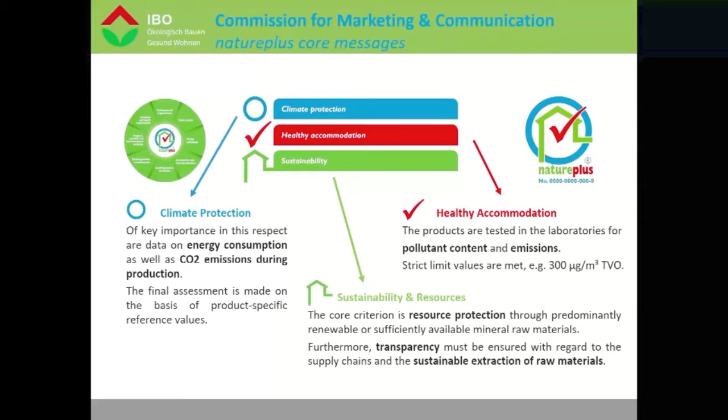Natureplus was founded 20 years ago in 2001, and the members of the Natureplus Association are from all relevant areas of the construction sector. Our core, what we really want to do, is help for people- and resource- and climate-friendly production. These are the most important concerns of Natureplus, and so we developed the Natureplus label for sustainable and healthy buildings.

This label reflects the holistic approach. Developing criteria is a lengthy and detailed process, but it's the only way to find products that meet all different requirements in the best possible way. This fulfillment is then verified by tests from independent labs and by factory visits, and these assessments are also regularly repeated. This eco-label guarantees that the product is far above average and is really a sustainable and climate-friendly choice, and this is European-wide.

So it's not only the label, but it's also providing services, doing some knowledge transfer and also doing some networking. The Natureplus database is really helpful to find products - there are more than 500 certified products to find there. And if you want to get involved, you are heartily welcome.

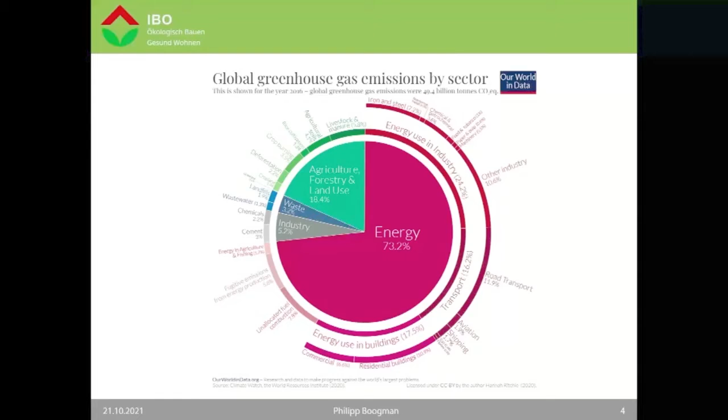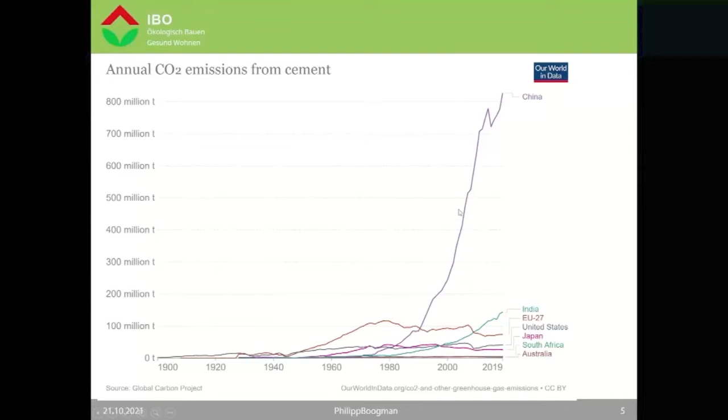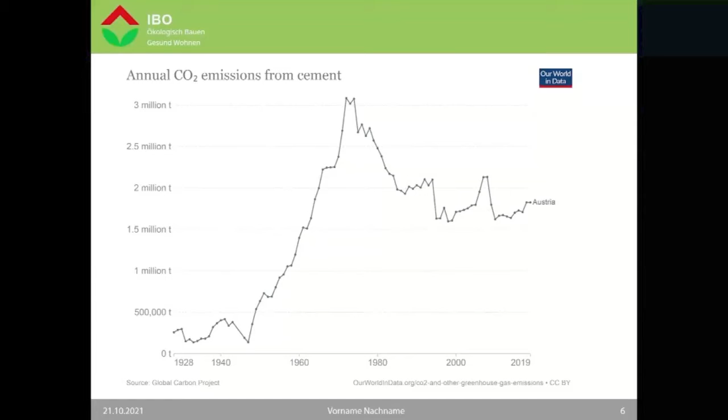So before we listen to Sebastian Spaun, I want to talk about some CO2 terms and definitions. The one is the CO2 equivalence. When we talk about emissions, they should always be counted as CO2 equivalents.

CO2 is the main culprit of the greenhouse effect, so it's the leading substance. The effect on climate of all other substances is then accounted compared to this CO2. For example, methane is accounted to be 25 times more effective on the climate than CO2, therefore leading to a 25-time higher CO2 equivalent.

Some other terms - we should always differentiate between biogenic and fossil emissions, because biogenic emissions, as you all know, are called CO2 neutral, because plants, through photosynthesis, catch the CO2 from the atmosphere and give oxygen back to the atmosphere, and therefore it's called CO2 neutral. Another important term is the carbon content, which means how much carbon is in the material.

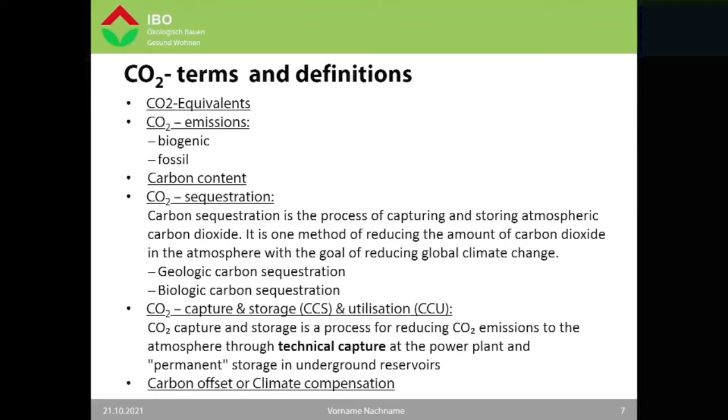So I will give you the... Philipp, I have done that already. So okay, yeah fine, we can see already the slides.

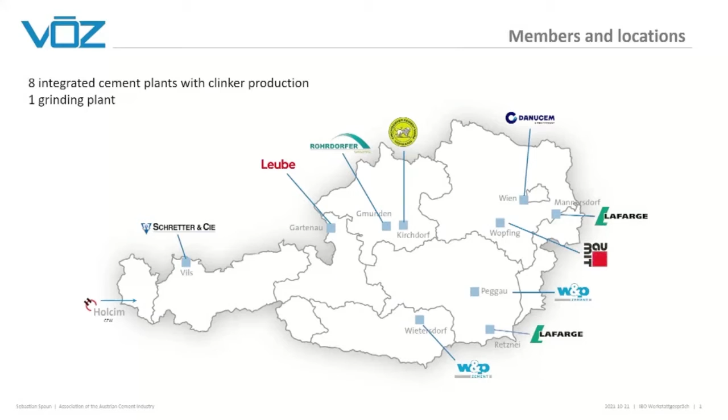Coming back to the global CO2 emission, I did a lot of studies on that, and I'm pretty sure that this 4.5% actually is the number linked with the direct emissions of our industry worldwide.

The best statistic you get is from the Netherlands Environmental Assessment Agency. It's the only one doing this calculation every year, summing up all the scientific data, the same the IPCC uses. The last number for 2019 was 57.4 gigatons, billion tons of CO2, including everything: methane, F-gases, and the effects of land use change and deforestation, which I think is important to include since we're speaking about climate change and how to avoid it. The emission of the cement industry is 2.2 billion tons, so 4.5% is the actual figure.

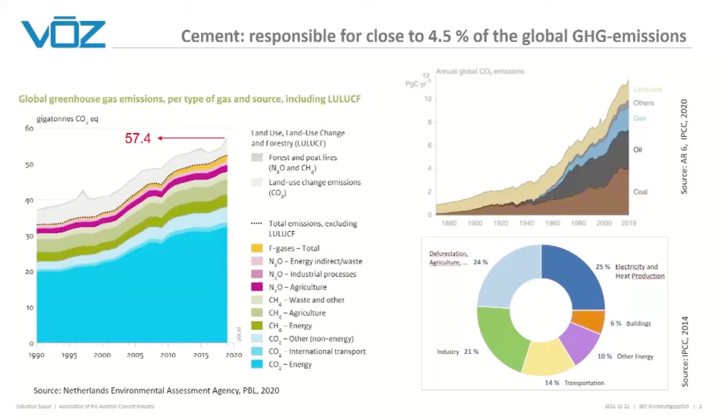Very often, newspapers and studies only compare cement's CO2 to CO2 alone. Look at the chart on the right side, coming directly out of the latest assessment report, the 4,000-page one. When you link CO2 only to CO2, then we have 5.5% of CO2 emissions. So these are the numbers. The numbers are high — 2.2 billion tons we have to bring down to zero as fast as possible.

There is an interesting comparison from Karen Scrivener, the famous binder professor at EPFL in Lausanne. It's interesting what she's stating: that the embodied energy and carbon in concrete isn't as high as often stated compared to other basic materials we use in society. The embodied carbon in concrete isn't too high.

Yeah, and please, is there a question? No. Yeah, I have a question. Yeah.

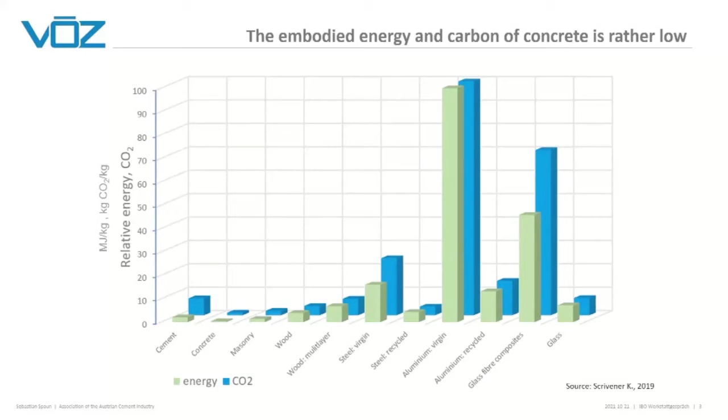So I fully accept what you're saying, Philipp. I know you're an expert in EPD and LCA, so we have another important input from our guest. We have to take into account that these are figures per kilogram. So yes, that's what I said. The functional equivalent you're using, for example when you compare houses, is per wall or cubic meter or whatever. You are the experts, but this is what I said, it's kilogram, it's kilogram. But I will come back to solving this, and I have another chart which is probably also astounding.

If you take food like meat from the cow, like cheese, like pork, you see that 1 kilogram of Austrian meat has a carbon footprint of 14 kilograms CO2. Then it goes down to 1 kilogram of normal bread, which is responsible for 1 kilogram of CO2. And then you see carrots and vegetables, which we all know about.

But if you now put cement and concrete into this chart, you will wonder. You see, Austrian cement is around 500 kilograms per ton, which means 0.5 kilogram per kilogram. And you see where concrete is, with around 80 kilograms per ton, or 0.08.

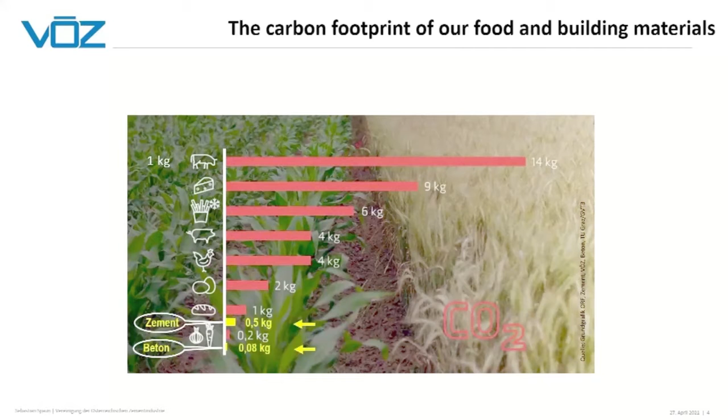So what I want to say is, Philipp, you said it. When it comes to climate change and the fight against it, we all have a personal responsibility to eat the right products, to build with the right building materials, to lower our personal footprint of transportation and so on. Climate change needs action in all and every area, and I will speak about my area to be sure.

Here, I would like to show you that very often when it comes to concrete, timber, steel, bricks and so on, the discussion is dominated by the question: can't we substitute one building material with another? I would like to go a little bit into this topic.

On the left you see the global production of the last 20 years, from 2000 to 2020, of the main materials in the world, like chemicals, steel and cement. Philipp, you said it right: chemicals nearly doubled in the last 20 years, steel more or less doubled, and cement more than doubled its production, going from below 2 billion tons to 4.1, 4.0 tons. Now we are stable because China is built.

Between 2000 or 2005 and 2015, China was somehow rebuilt or built. So we see 2.5 times more cement than 20 years ago. By the way, 23 years ago I started in the cement industry, so it's tremendous. This has nothing to do with Austria.

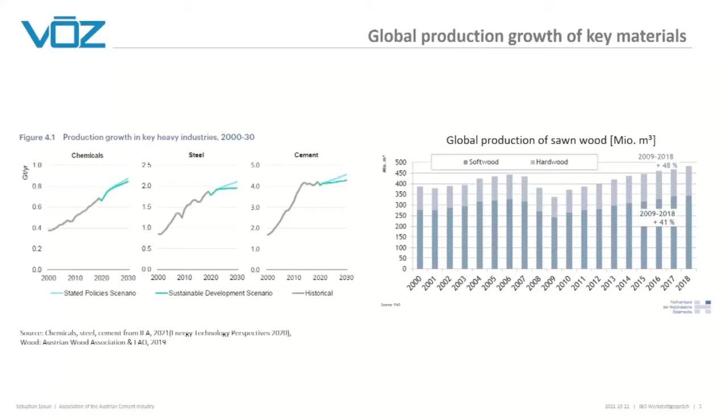I think, that's for sure, we have to learn to build with less. The famous Mr. Sobek told us that 100%. I'm 100% with you, but please, you can't make me responsible for these outline trends. We are all, as we sit here listening, responsible for that. We have to be. I'm just curious about the solutions.

I'm curious about the solutions—how to stop this resource consumption, this immense resource consumption. Exactly, so we have to bring down the resources, and we have to decarbonize. And every material has to do that, every building material has to focus on that.

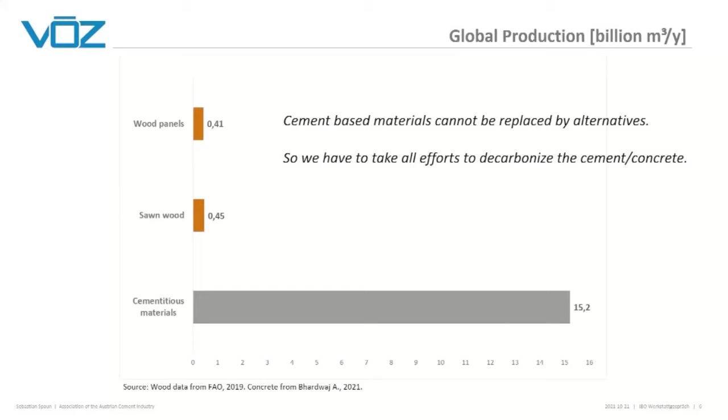Each and every one, because you showed in your first chart very impressively that one quarter of this red—mostly red—chart was green. And this green quarter was due to deforestation worldwide and agriculture. So these so-called green materials also have potential which they should better focus on, which is often forgotten in the discussions, I think.

But let's go on—how to do that? I would like to show you this chart because it's available and public, and then I will show you parts of the Austrian roadmap. This is the European approach of the European cement industry.

You see that in 1990, European cement emissions were around 700—it's in the inner circle, 783 kilograms. And here is the European roadmap for how to bring that to zero as fast as possible. On the left side, you see the approach we think is reasonable—the so-called 5C approach. That means we have to do everything to bring down the specific emissions of clinker, the main source of CO2.

We have to optimize our cements, the second C. We have to optimize the concrete. And then, very important, we have to go into construction. We have to bring down the material efficiency and material intensity of our production. Why do we need 20 centimeter thick walls just not to be able to look through sometimes? So we have to go into the design and the assembling. And then, of course, we need carbon capture in our case, and we need carbonation of concrete.

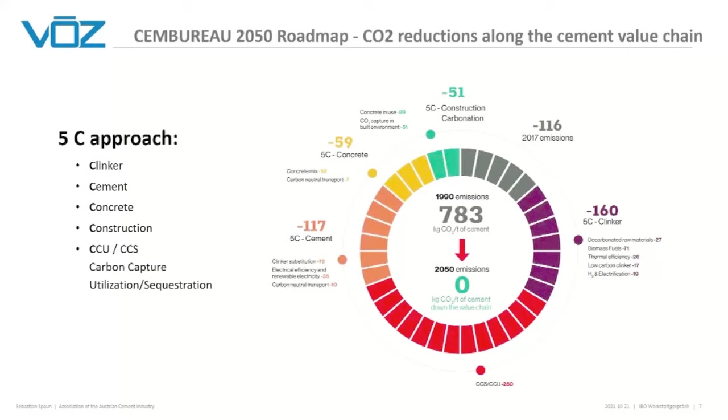And here you see the European picture. You see the levers. Since 1990, the European cement industry could lower this 783 by 100 kilos. And then you see all the classical levers you can bring down in technical process and industry, as we have. But you also see the red bars, between, I don't know, 4 o'clock and 7 o'clock. And you still see that the cement industry needs around 40% captured in our chimneys, in our stacks. We have no other chance.

And I will show you now how we see that in Austria. First I will focus on the levers we have when it comes to clinker production. Where do we stand in Austria? There are things like energy efficiency or the use of alternative raw materials, hopefully raw materials where you have less calcium carbonate and more calcium oxide. But this is difficult. What I can show you is that Austria has one of the highest alternative raw material amounts.

In our raw material, Europe has 3.9% and Austria is already at 14%. For example, we are using close to 1 million tons of construction and demolition waste, also brick meal, in our raw materials to substitute clay, natural clay. So we are one of the biggest users of construction and demolition waste. So let's see, we are making cement out of construction and demolition waste.

The right chart, do you have a question? Just the question is, is this in the clinker where you replace the raw material in the clinker? No, the left chart is in the raw material directly, instead of clay and limestone.

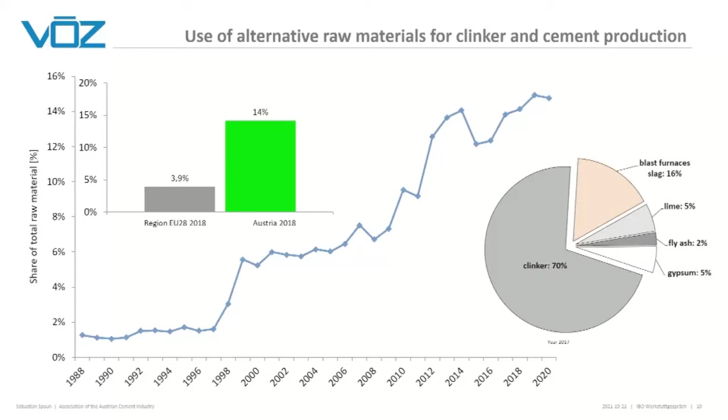This is the blue line, and on the other side, I show you how the cement is constituted in Austria. We have around 69 to 70% clinker as main constituent, and we are using blast furnace slag, lime, fly ash. Fly ash is going to zero, by the way, because Austria closed its last power plant, I think it's 2 years ago. So we are running out of this coal-based fly ash, and we need gypsum. 70% is quite good, but I will show you how we want to go further in reducing the clinker in our cement.

A second lever for clinker is the fuels we are using to heat the kilns. Here, Austria is outstanding worldwide. We already were above 80%. I think in the year 2019 we fell back a little to 78%. So we could substitute coal, oil, and gas in our kilns with waste fuels, mainly non-recyclable plastic, waste tires, with somewhere around 30% biomass content in all these mixtures. Europe is at 50%, the world is at 19%. So we are quite good in that. And all these effects together...

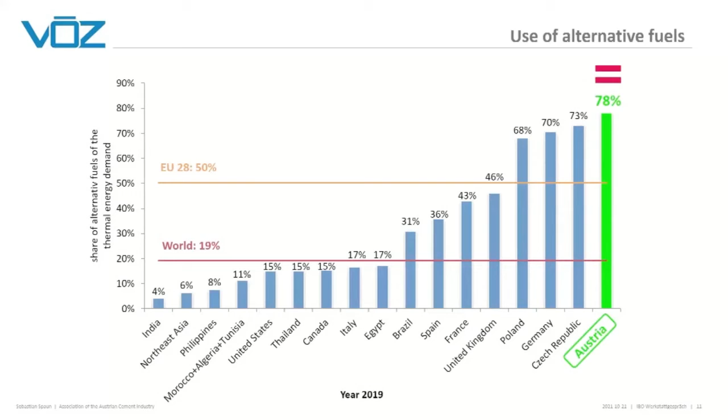Now here's another chart. When we are producing cement in Austria, we are using close to 450 to 500 kilograms of secondary materials. As Philipp said, we are producing 5.2 million tons of cement, and we are using 2.4 million tons of secondary materials - secondary materials in the raw materials, secondary materials in our cements to substitute clinker, and alternative fuels, like non-recyclable plastic and so on in our kilns. Plastic that otherwise would have to be burned in waste incinerators, since Austria, I'm very happy about this, has very strict landfill laws - we are not allowed to landfill burnable materials. So the Austrian cement industry has one of the very highest secondary material recycling rates in the process, close to 500 kilograms per ton of produced cement.

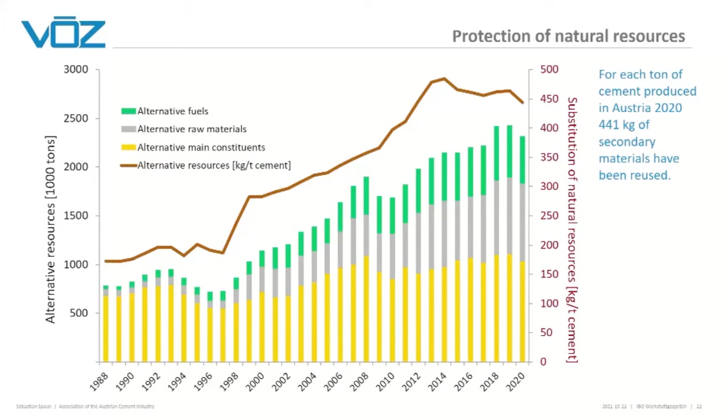And all this together leads to a world-leading position in CO2 efficiency. So the cement in Austria is a little bit above 500 kilograms CO2, which is still a lot, but compared to 1,000 other cement plants in the world - the Global Cement and Concrete Association in London does this approach every year. We started it with the World Business Council for Sustainable Development, and we've been doing this for close to 20 years.

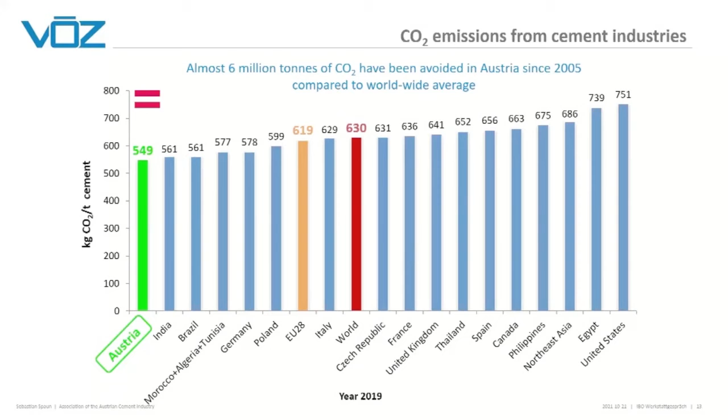Austria is leading, I think now for six years, the worldwide ranking. But this shouldn't mean that we did enough. How can we bring this down further? Here I will focus a little bit on cement, mostly on cement.

So what is our path towards neutral? We are right now developing and doing a lot of research for new cements with less clinker in it. The so-called CEM2B are nearly rolled out in Austria, and they are on the way to becoming the new main cement, coming from CEM2A. We are also in development, and in procedure with our building authorities, to get CEM2C into the permitting process and then into the market. CEM2C goes down to 50% clinker.

We are also already doing research on CEM6 cements, which go deeply below 50% clinker. This is a big lever, of course, because clinker, as I said, holds the process emissions and the fuel emissions of the kiln. So every percent you bring down the clinker content is really a big lever in decarbonization.

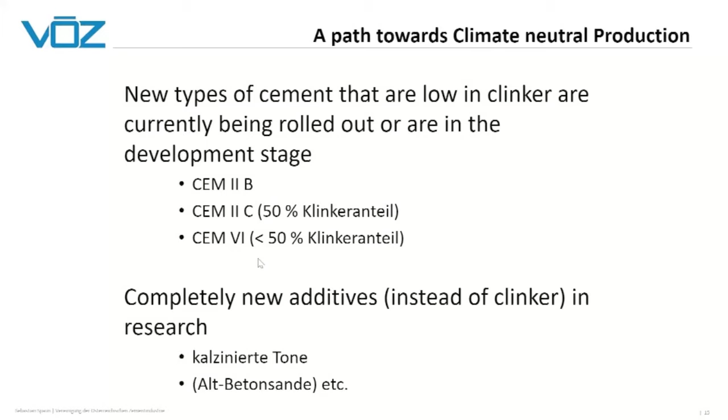Every percent bringing down the clinker content means big changes in the way you use this material. So it needs a lot of research to keep the performance of the cements high, when it comes to compressive strength and things like that, which are very important for the construction industry, while doing all this with less and less clinker. This takes time and takes a lot of research.

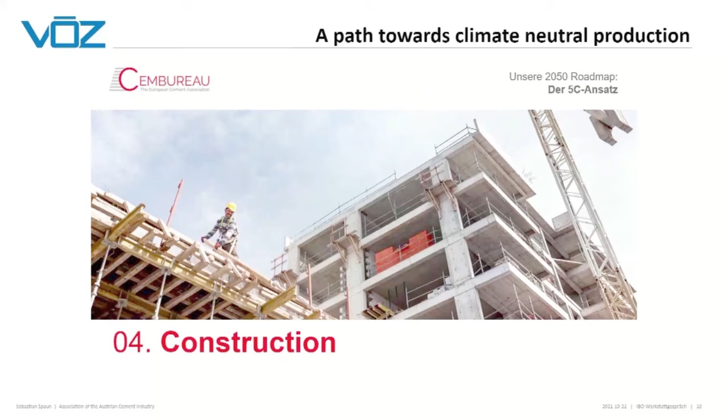When it comes to construction, well that's not part of the cement industry, but our industry is very convinced that construction also needs a completely new design approach. I stole these wonderful pictures from the famous institute in Stuttgart, ILEK, from this famous architect Sobek.

This is still mostly in the university. On the right side is the ETH, the NEST building, this famous one. Students and academia are going in this bionic construction direction, really optimizing building materials to put the right performance at the right point.

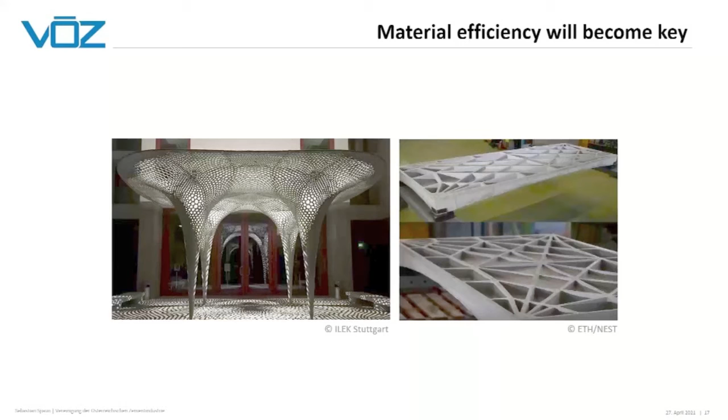I'm very impressed with the next pictures, also from the ETH in Zurich. If this would be a traditional concrete ceiling, which is normally, I'd say, 20 centimeters thick, and this is 15, here the students at ETH showed how we could bring this down with the same compressive strength, and so on, resulting in a construction with minus 80% material. I'm not convinced this means minus 80% cement or clinker, because you mostly then need a very good binder, but the direction is just the right one.

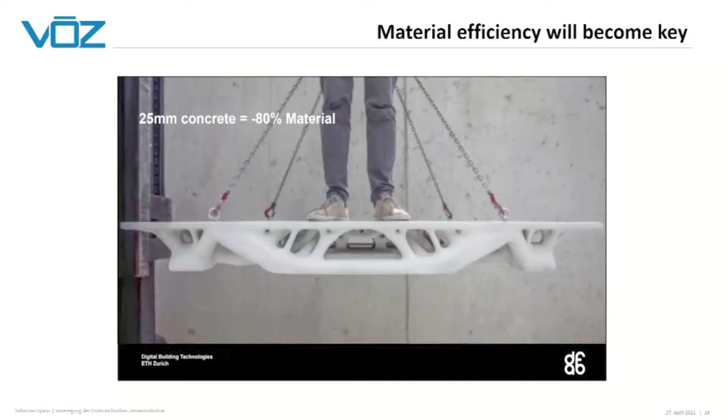We have to show how we can achieve the same functional unit with less material, and therefore less carbon and resource intensity. We really want to motivate university students, architects, and young fellows to go in this direction. We have no interest at all in not changing very traditional building behaviors. We know we are working in a sector where innovation takes a long time, but we also know that this is one of our biggest disadvantages.

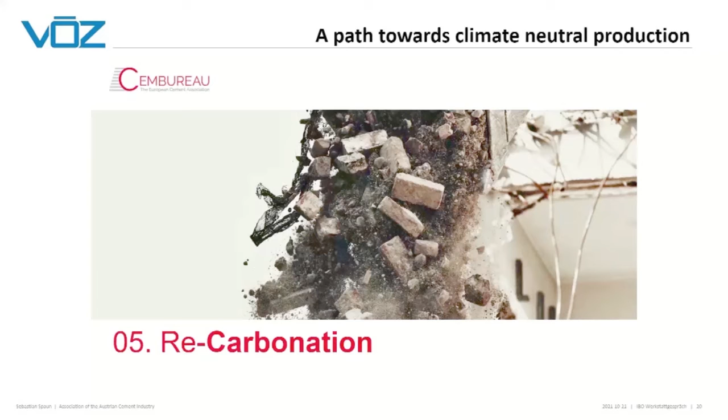We have to be faster on that, that's for sure. And then another C is the carbonation. Philipp mentioned it already, that concrete is able to take up CO2 from the atmosphere.

So you see it's not 100%, it's somewhere around 20 to 30% of the potential in the life cycle of a building. But be aware, when you're at the end of the lifetime of concrete, you recycle it and break it to small diameters, like 10 millimeters and so on. Then the normal air of the atmosphere can carbonate all its surfaces.

There are many numbers in the room, but the most important thing is that we will go into a new recycling of concrete, where the goal shouldn't be to make it as cheap as possible, where the goal of CO2 uptake should be focused on more than it is now—because right now it's just universities and some startups really trying to bring this recarbonation up to the highest level.

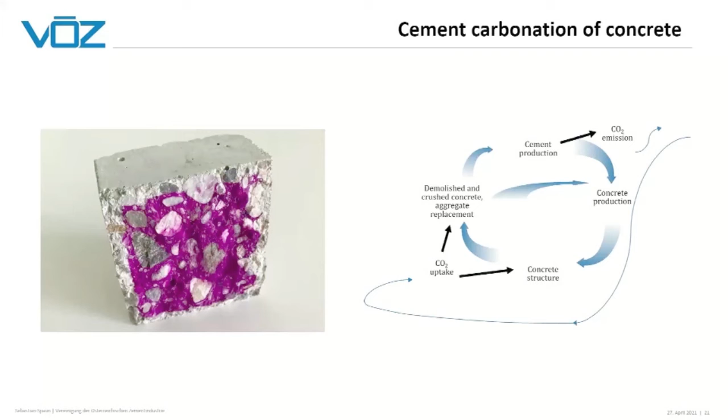But it's a very simple and natural process that can be forced in the recycling phase. In the life phase, nobody can force it—it depends on the quality of the concrete, how fast CO2 goes into the pores and carbonates. So a very good concrete has low carbonation, a low quality concrete has high carbonation. Here you can measure this, you can see it, it's very exact.

So carbonation is one of the tools we want to use to bring down this process emission, in the lifetime and in the recycling. And of course, this is only around 20, 25, probably 30%.

One thing is important: in the sixth assessment report of the IPCC, which came out this August—terrible to read, the first 50 pages is enough to really get a dramatic picture of the situation of the world—all the numbers are much higher and much faster than in the last assessment report. So I hope all the politicians now for Glasgow read this first 50 pages. This is enough to understand how dramatic the situation is.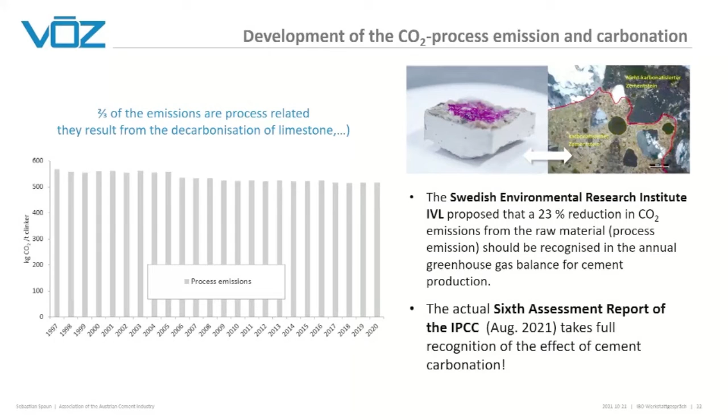But when it comes to carbonation, I'm happy that for the first time the IPCC fully takes recognition of this concrete sink, or cement carbonation effect, and from now on official accounting will take place on IPCC on this effect. But now I will come to this Austrian roadmap, which is still a draft.

We are ready with the calculations, but we haven't published our roadmap. Just to show you—I'm sorry, it's in German. On the left side, you see 100% of our emission, which sums up to 2.8 billion tons, million tons.

And then you see the levers: what we think we can achieve in clinker production, what we can achieve in light green, in lowering the clinker content in cement, and how much power there is in decarbonizing the electricity we need for grinding cement and running our companies and industry.

It's not a lot of potential, because Austria already has very green, or kind of green, electricity. Transport also doesn't play a major role when you look at the production of one ton of cement. Then you see the potential of carbonation of concrete. Yes, there is a certain potential. Yes, we have to really bring this out, that recycling could be and will be done differently in future to maximize this carbonation effect.

Yeah, but in violet, then you see that we in the cement industry need this carbon capture. And of course, when you then capture the CO2, which is very expensive, as Philipp said—what to do then with the CO2? I will show you what we are running here.

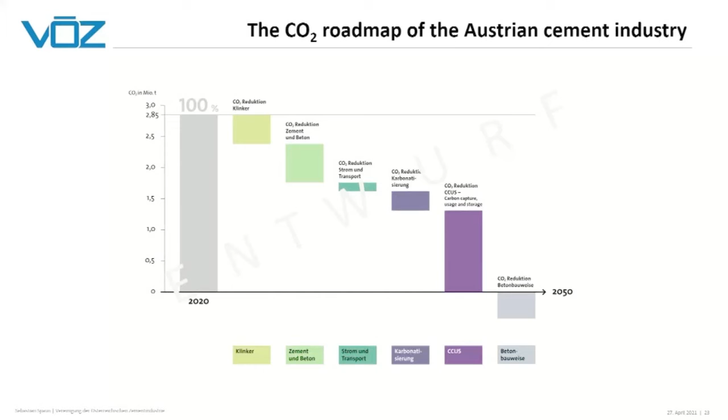The situation is completely different in the member states around the North Sea. Norway, Sweden, Denmark, Germany, UK, and Netherlands are really planning a full sequestration system for industry around the North Sea. We are seeing prices, pipelines being built, and the first cement plants around the North Sea will come into operation with sequestration in 2024 to 2025. We'll also see the first chemical industries fully decarbonized with sequestration there in the next 5 years. This is a lot of competition for Austria and our industry, because in the North Sea, CO2 sequestration is somehow state organized by the member states, so we have to go another route here.

The route I can show you is a pilot project called Carbon to Product Austria. After 2 years of funding and development, this project is getting more and more visible.

Here you see the Lafarge plant in Mannersdorf, the biggest cement plant in Austria, which will capture CO2 first in a pilot, but by 2030 they want to capture the full CO2 emissions of this plant, which is 700,000 tons per year. Then Verbund, the biggest electricity company, would bring in renewable energy and make hydrogen out of that. Together with the CO2 from the cement plant, this would go into the refinery process, and then into polymerization at Borealis, the biggest plastic producer in Europe, making close to 1 million tons of new plastic materials. This is a very interesting situation for us, having the refinery, the polymerization plant, and our biggest cement plant connected with just 20 kilometers of pipeline. We could really solve this.

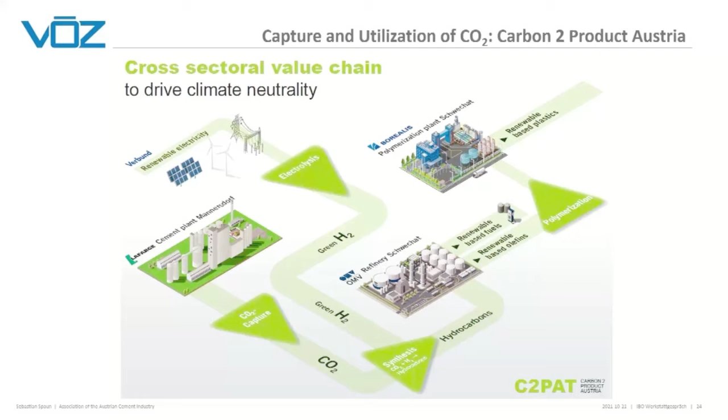We'll get funding from the EU Innovation Fund, and it's also part of the IPCEI hydrogen program. The consortium is very positive about getting the green light, but it is expensive. The pilot plant for 10,000 tons will cost 120 million euros. But we need these pilots to really figure out if the technical process works well, and then to begin the upscaling—because going from 10,000 tons to 700,000 tons requires a lot of cost and energy.

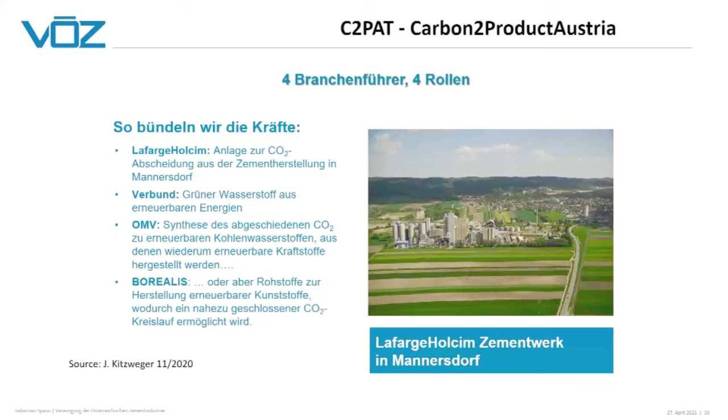It's a very interesting and powerful consortium—the market leader in plastic, in refinery, in electricity, and also in Austria the market leader in cement. But the whole cement sector is supporting this project, because a small cement company wouldn't really be able to make an investment in a pilot of 100 million. So we are all very happy and hopeful that we get this pilot on the ground in Austria. You can imagine that in Europe and worldwide, there is a lot of competition to get this completely new technology on the ground first.

What I said in my title was, are we speaking about a new circular economy? We think yes. The utilization and use of CO2 as a new feedstock is, of course, at the center of this project.

We can also show a new circle for carbon, which means we would burn this non-recyclable plastic of the future. When you speak with top experts of the plastic industry, they will tell you that more than 50% of mechanical and chemical recycling is not seriously possible or is not seen in the future. So there will always remain a waste rest, and we think it's a positive thing to burn this rest in our kilns, because we need that energy to produce clinker, then capture it so that no carbon will see the atmosphere, and then bring this CO2 with hydrogen together as new feedstock.

Plastic is also in the future the most growing material in the world. I think it will not be cement anymore — it will be, for very many reasons, hydrocarbon and chemicals. And so we could close a loop. We cannot bring away this carbon, but we can show that we can keep carbon in a cycle. To be very honest, we are bringing in also carbon from the limestone — 2/3, that's for sure — but it is probably a second effect to have plastic not in the atmosphere, not in the ocean, but in a circle that can be completely renewed, because we bring it down to the molecular area.

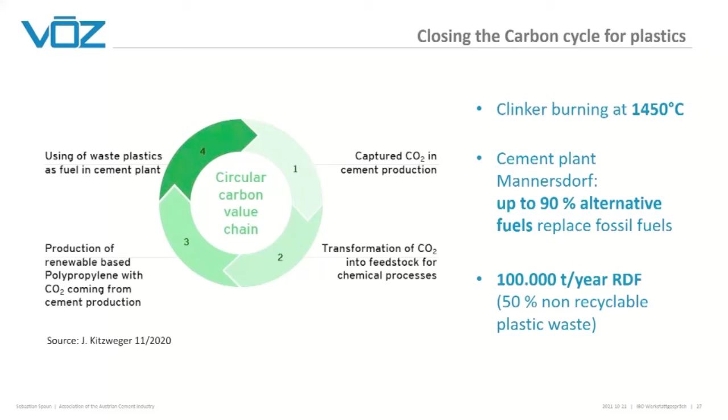So I'm coming to my last chart and to the conclusions. I wanted to show you how this decarbonization roadmap will work, and we are fully committed to the figures we will bring to the public in the next 2 months. CO2 reduction in clinker production, including the development and upscaling of carbon capture, storage and utilization, is for sure, when we bring this project to the ground, one of the main levers we have.

Then, of course, the optimization and lowering of the clinker component in the new cements, in the composite cements, with the CEM 2C and CEM 6 cements. We have to find new materials for that, because we are running out of the secondary materials of other industries.

We will have to go for a very targeted selection of concrete types with low CO2 emission in the planning phase. As I showed you, we will have to focus on really optimizing each and every building part in a building to best use the manners, the strengths and the functions of a material. So a completely new design, and yeah, also a big step in the construction industry — probably with digitalization it will be easier. We will have to learn to construct our buildings much more efficiently.

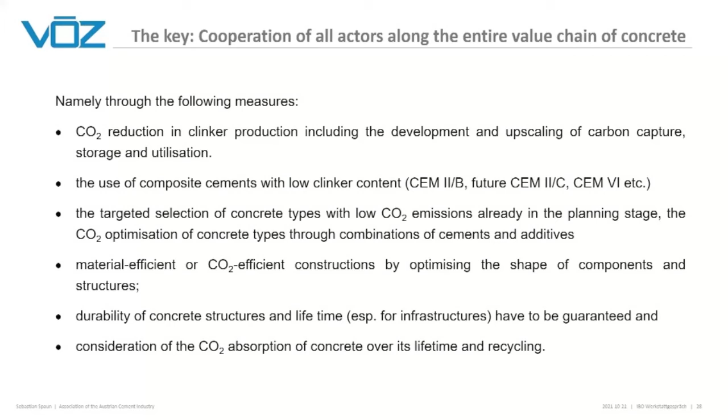Thank you, Sebastian. I didn't interrupt you because I thought it was very interesting to follow you. So, but I still have one or two questions from my side, and then I think we would open the platform for everybody to ask questions, if you agree.

My first question is to the use of alternative fuels. You said it's about 78% in Austria, and these are very impressive figures. But I dare question the conclusion, because Austria burns more municipal waste in cement plants than other countries. Isn't that correct? I mean, for example, in Germany they also burn car tires and use the energy, just not in cement plants, for some other industry parts. So isn't it somehow a bit of a delusion that Austria is so very good in using alternative fuels? I think other countries use them as well, but just not for the cement industry.

No, I would say, if you look at how much waste is burned in Austria, we are using around 500,000 tons in the cement plants. But the incinerators in Austria - as you know, we have a very developed waste management system, one of the best in the world, I would say - we are using at least five times more waste in the incinerators.